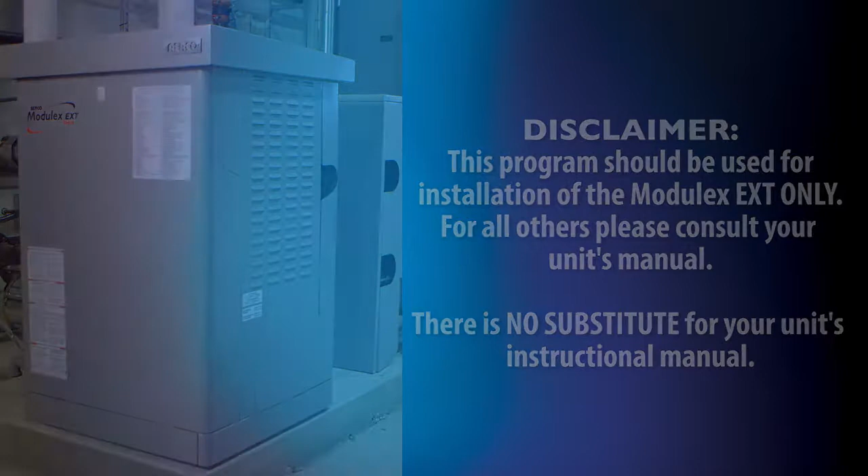Before beginning the installation of your unit, please review this list of important equipment and instruments that you'll need to perform your installation. You should have assorted screwdrivers, metric Allen wrenches, and metric sockets, a ratchet with extensions and a U-joint, metric wrenches and an adjustable wrench, assorted pliers, tools for cutting the metal flow switch paddle, a hacksaw, and a forklift or a similar piece of equipment for lifting and moving your unit.

Before we show you the procedures for installing your unit, some important warnings. First note, this appliance must be installed by a qualified engineer or technician. They must comply with the technical requirements and, under their own responsibility, guarantee the compliance of the standards according to the latest local and national regulations. Please use caution. The whole system should be thoroughly flushed in order to remove any residual dirt or grime. Not performing this step could compromise the correct operation of your boiler.

Also, please take note. Properly treated system and feed water is essential to eliminate or substantially reduce the following problems from occurring: lime scale deposit, corrosion sludge, deposits, molds and bacteria. An appropriate treatment of the supply water will prevent these problems from occurring and will help you maintain the correct operation and efficiency of your unit over time.

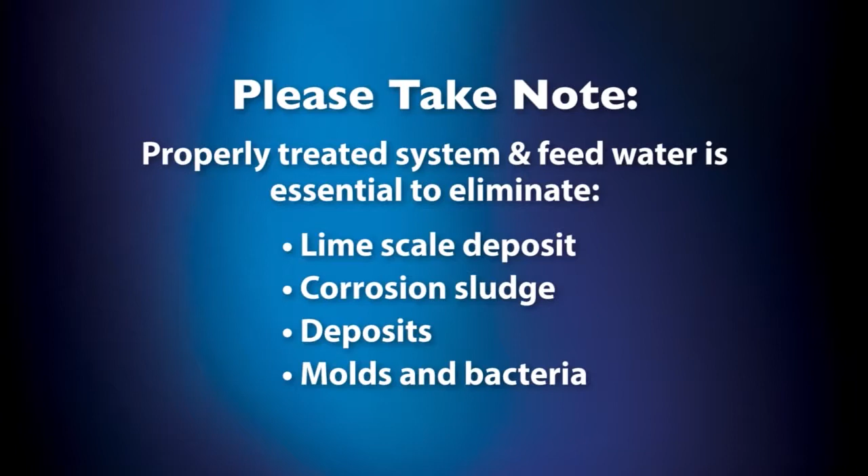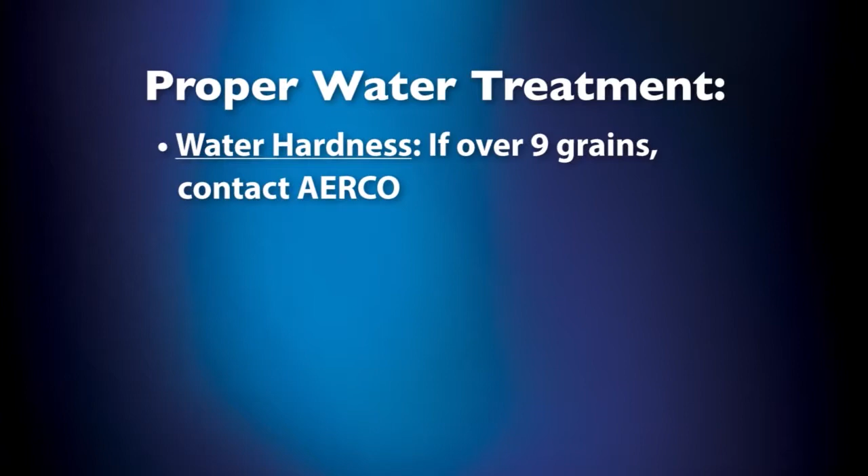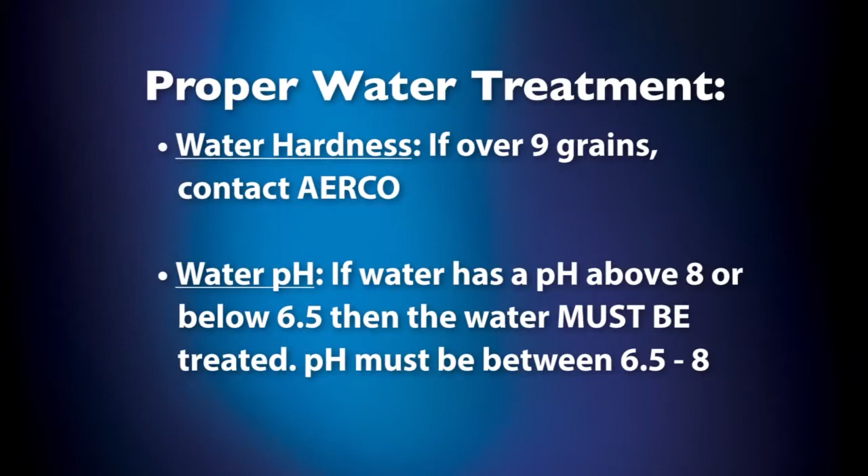Next, some important notes on proper water treatment. In order to properly treat water for use in a hydronic boiler heating system, the following physical and chemical characteristics must be addressed. Water hardness. If the water hardness is over 9 grains, contact AERCO. Water pH. If water has a pH above 8 or below 6.5, then the water must be treated to provide a medium pH of between 6.5 and 8.

Please note, for additional information concerning water quality and treatment, refer to AERCO Technical Documents Glycol Directive C401.0 and the AERCO Piping Application Guide GF-136-P.

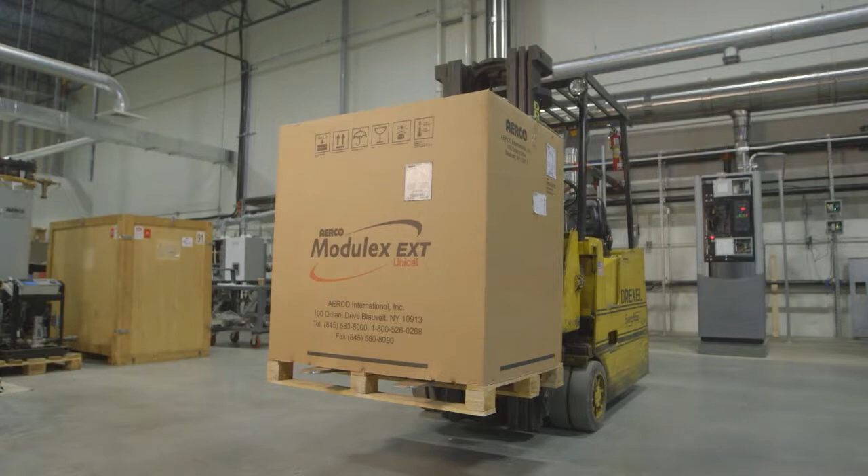Your Modulex EXT is delivered to you fully assembled and carefully protected by a plastic bag inside a strong cardboard box that is fixed on a pallet. This allows your unit to be handled easily by a forklift. All units are capable of passing through a 36-inch doorway. This includes commercial-sized units. However, please note they may require minor disassembly to make this possible.

In addition to your unit, you will receive additional components. Before we proceed with this list, please note that the components will vary from unit to unit. Your unit will be accompanied by the flue exhaust terminal screwed to the front of the frame, the sealing gasket for flue outlet mounted in the flue assembly, the sealing gasket for connecting the condensate tray and terminal, 2 bends, 1 T-piece and 1 plastic plug for the condensate drain, the screws necessary for installing the flue exhaust terminal, the external sensors, remote domestic hot water storage tank and an outdoor temperature sensor, a flue gas sample port for flue exhaust gas sampling tests,

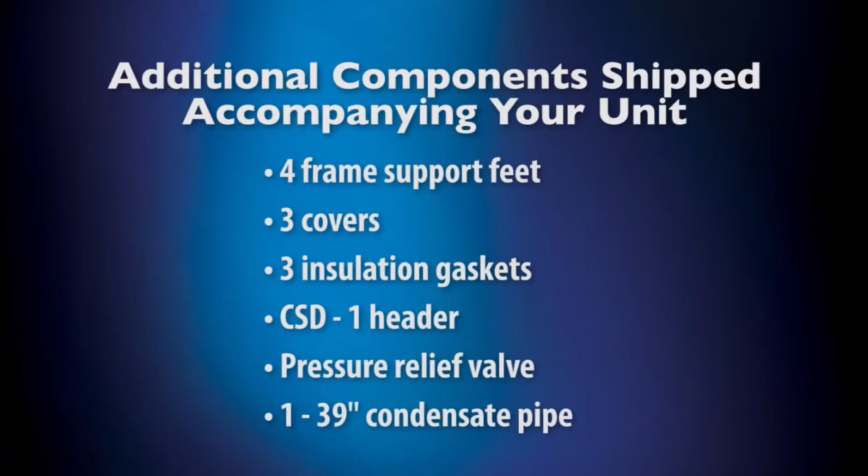a resistor kit for emergency operation, 4 frame support feet, 3 covers for switching piping locations, 3 insulation gaskets for air intake. These are to be used for installation outside. A CSD-1 header, a pressure relief valve, 1 39-inch pipe for the condensate evacuation system, left and right side covers, a plastic bag containing the user manual and the E8 controller instruction manual, 2 pins to hold the burner assembly in a raised position, a temperature and pressure gauge, a flow switch, and a rubber pipe adapter.

Commercial units will be delivered with all of the components we've already listed, as well as a burner lifting kit and an air intake starter piece that fits spiral ducts only. For any other vent or air intake starter pieces, contact AERCO directly.

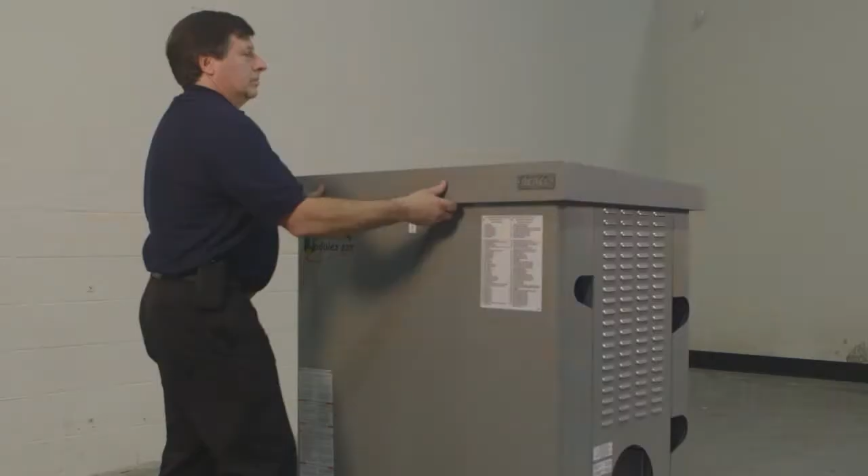Now, we'll show you how to remove your unit from its packaging and how to install the feet. First, locate the front screw. Unscrew it. Then, go to the back of your unit and unlatch the 2 latches in the back. Now, pull off all of the panels on your unit as shown here.

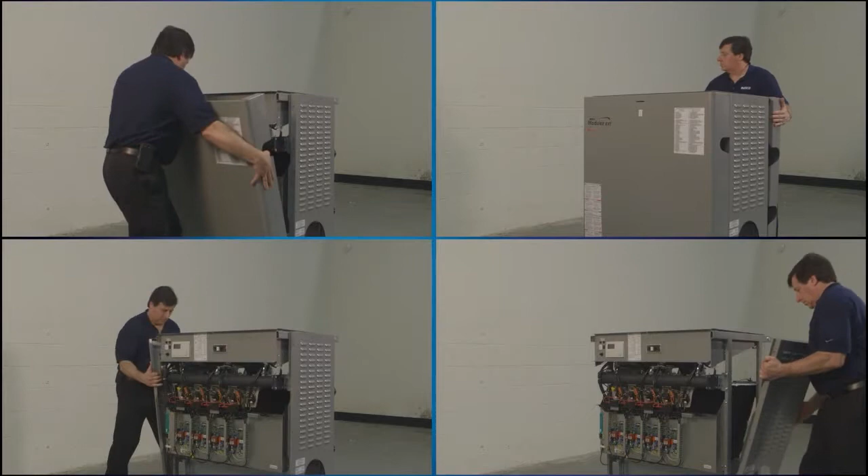Now, locate the 4 support feet from one of the cardboard boxes that accompany your unit. You will need to attach them to the chassis as shown. Proper assembly should look like this. Now that the feet are attached, place your unit on a concrete slab that resembles this.

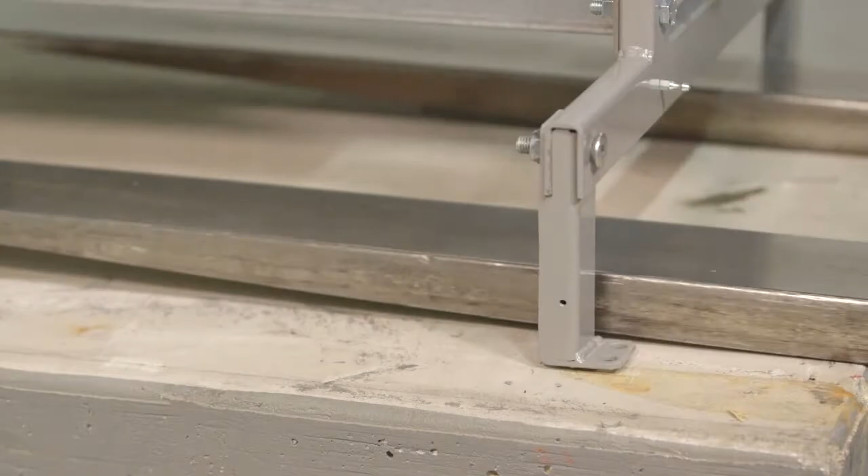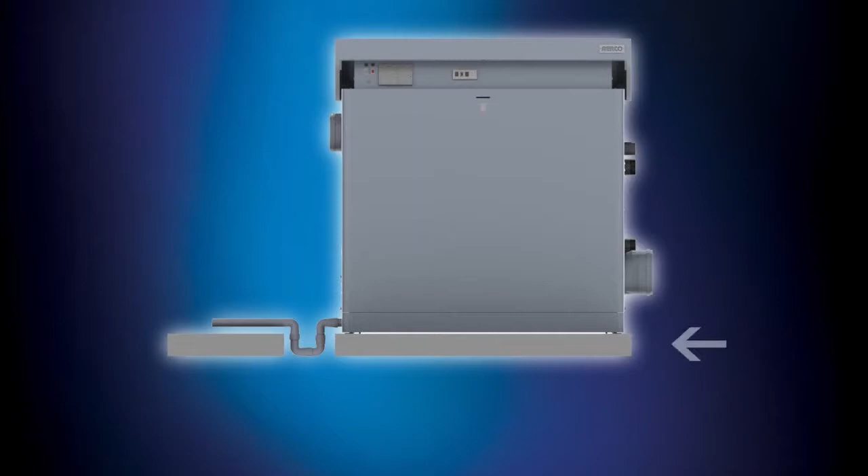When determining where to place your unit within the boiler room, special attention should be paid to local regulations and laws about boiler enclosures and boiler rooms. Your unit should be placed onto a flat and sufficiently strong base. This foundation should have the same dimensions as the boiler and should be at least 4 inches high in order to assemble the condensate drain.

Alternatively, a 4-inch deep well or trench next to the boiler that can accommodate the condensate U-drain pipe would also suffice. During installation of your unit, select a perfectly horizontal and stable location as shown here. This will greatly reduce vibrations and noises during operation.

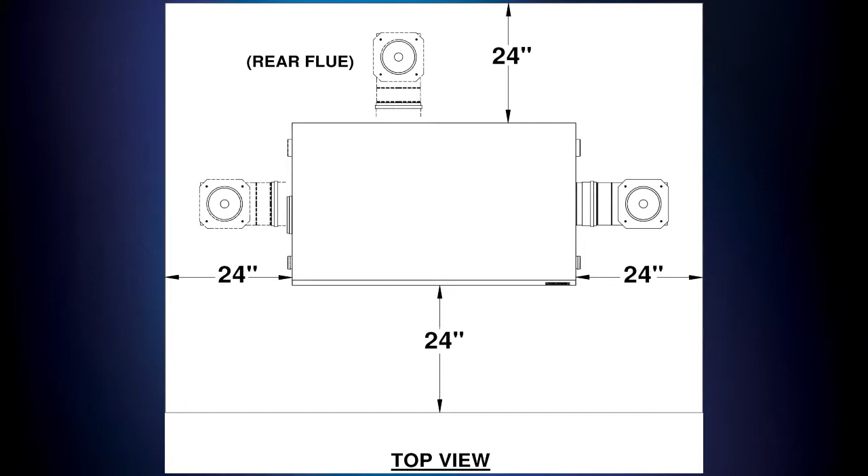Particular attention should be given to the minimum clearances around your unit as well. Proper placement will allow for easier and more efficient servicing of the unit. This diagram shows the minimum clearances around a Modulex EXT boiler, 24 inches on all sides. Please note that clearances are similar for commercial units, but require at least 32 inches clearance on the vented side of the unit.

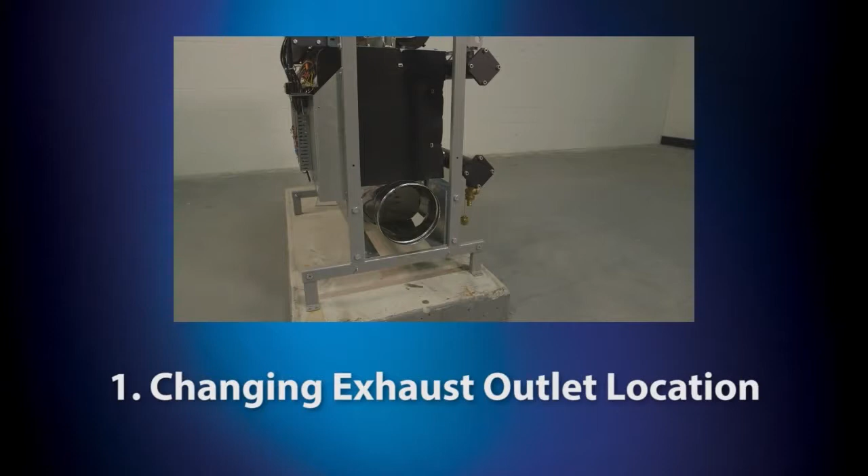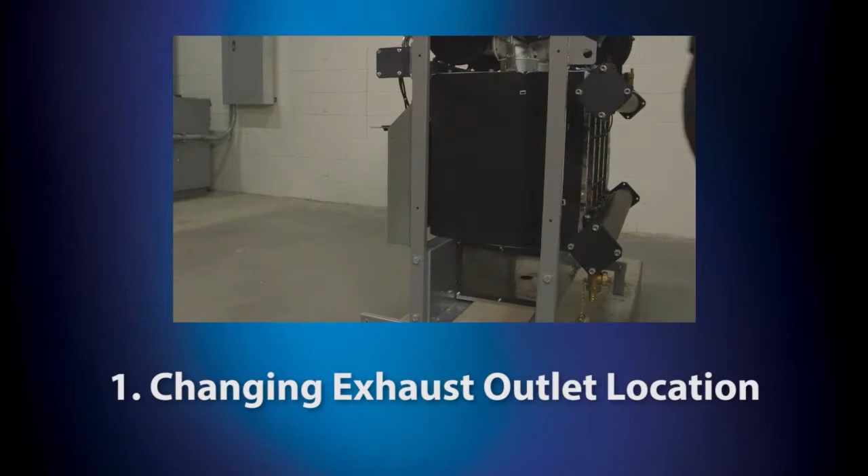First, let's show you how to change the exhaust outlet location. When your unit is delivered, the flue exhaust outlet terminal is located on the right-hand side. This is the standard delivery position. It can easily be moved to the left-hand side or rear position. A rear exhaust kit, which includes a hole cover for closing off the right-hand side panel exhaust opening, will be needed for this procedure.

Next, let's watch how the gas manifold connections are reversed. The gas connection is located on the right side of the unit, which is the standard delivery position. To move it to the left-hand side, swap the end plate and the gas supply connector as shown. It is essential that all gaskets and connections are reversed along with the connectors themselves.

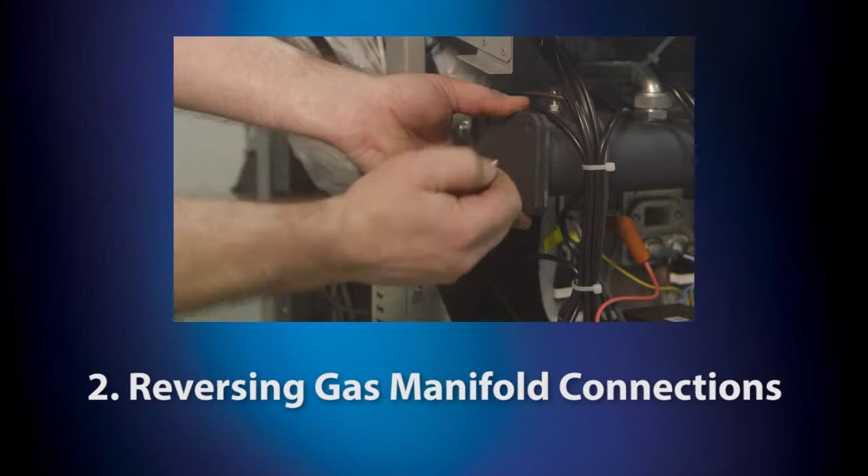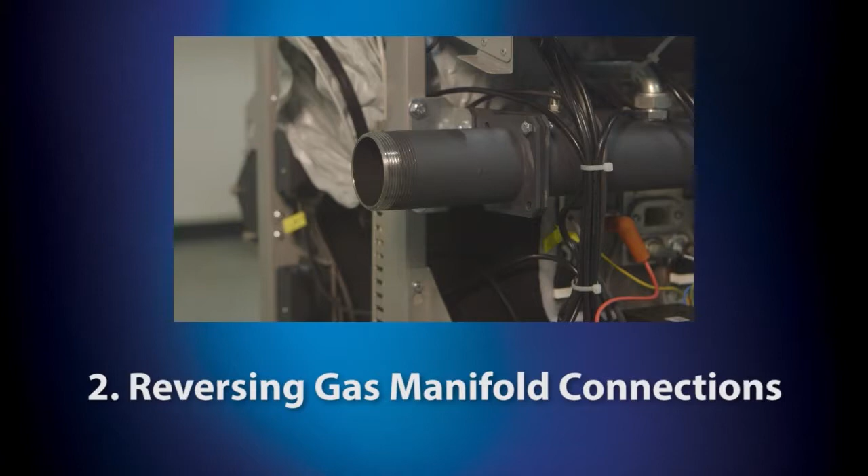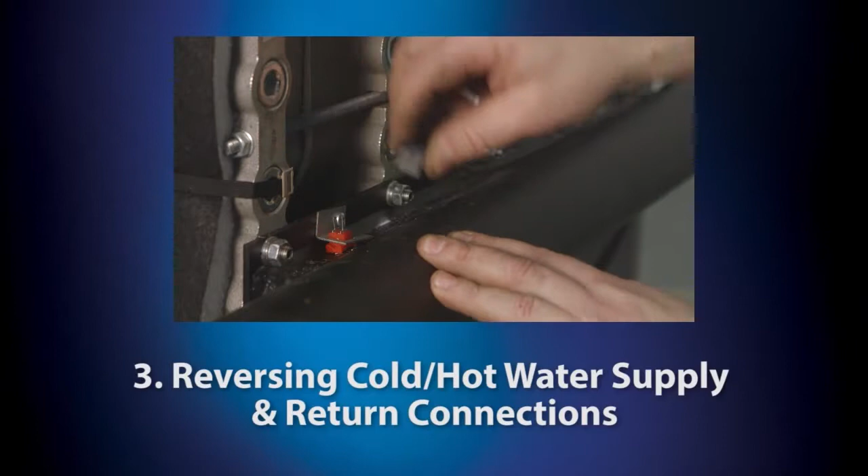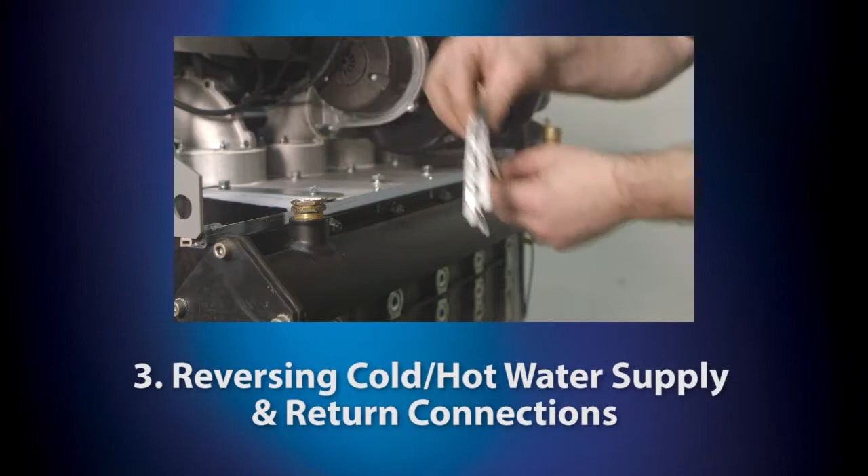Now, let's take a look at changing the water flow and return connections. This change requires that supply and return connectors are reversed as shown. Next, move the supply and return temperature sensors to the opposite end as demonstrated here. Exchange positions of the header outlet temperature sensor with the boiler sensor KF and the automatic air vent.

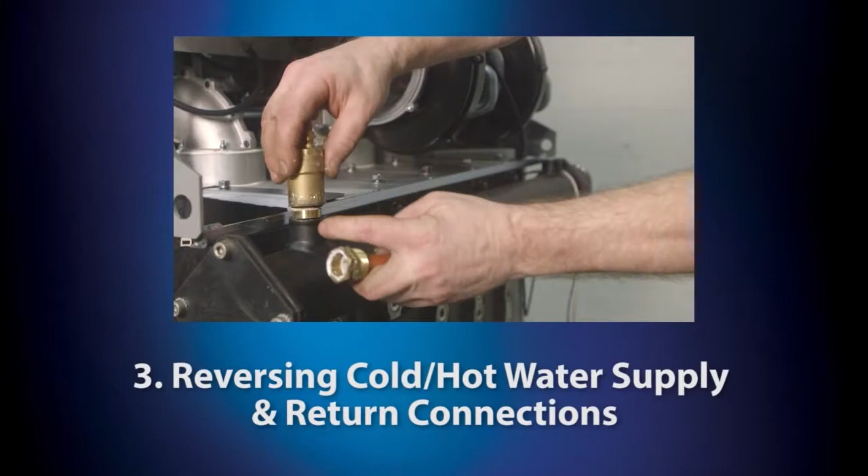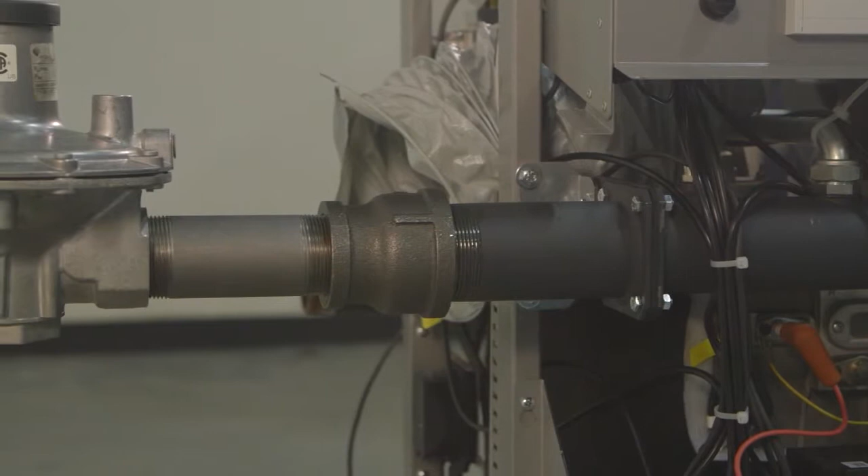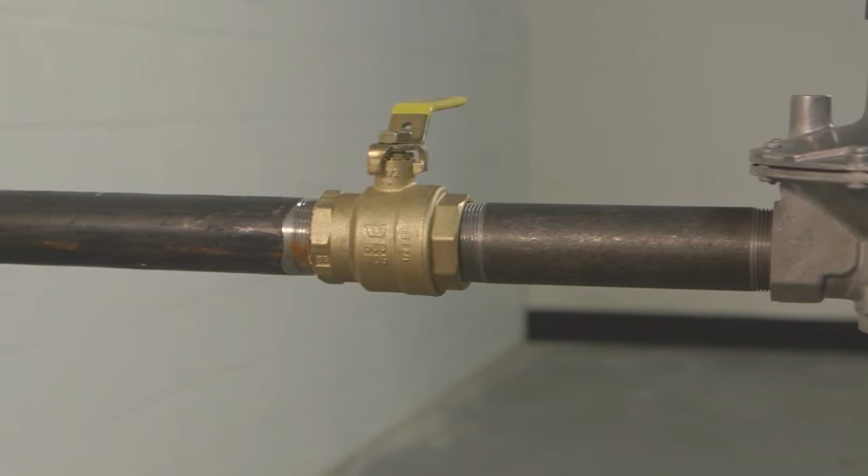On light commercial units, the boiler gas pipe is equipped with an external 2-inch male national pipe thread, or MNPT. The tailpiece of the gas shutoff valve can be connected to this as shown here. On commercial units, the boiler gas pipe is equipped with an external 3-inch ASME B16.5 flange.

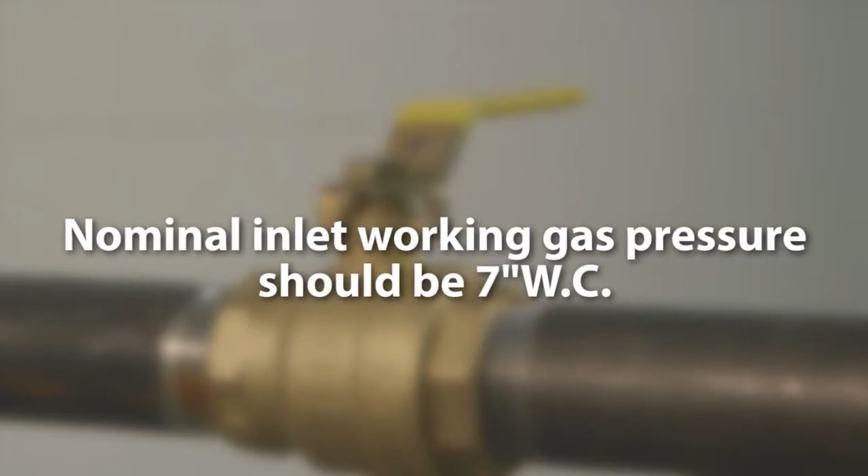When it comes to both light commercial and commercial units, the connection to the boiler must include a suitable method of gas shutoff, and a gas valve must be installed adjacent to the boiler for isolation purposes. The nominal inlet working gas pressure measured at the boiler should be 7 inches water column for natural gas.

Here are the natural gas supply pressure requirements for your unit. Maximum pressure with no flow is 10.5 inches water column. Minimum pressure with the gas flowing is 4.0 inches water column. This should be verified during boiler startup.

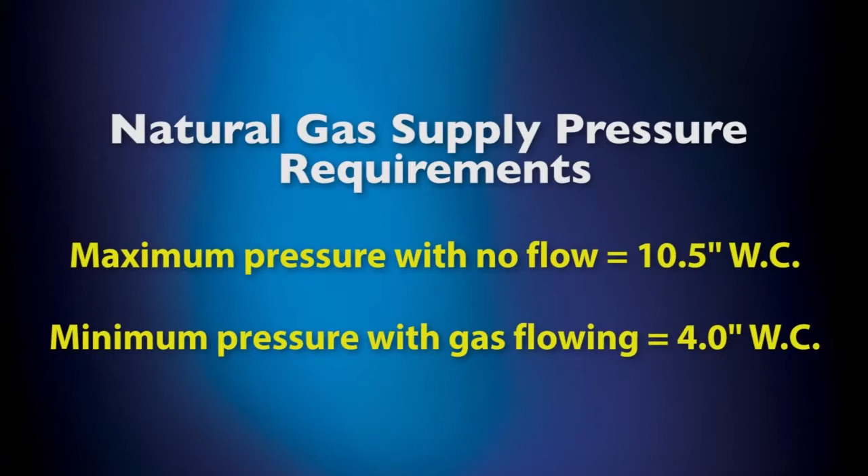Now that we've covered natural gas piping connections, let's cover propane gas piping connections. First, use a gas shutoff valve compatible with propane gases. A drip leg must be installed upstream of the gas controls. Here are propane gas supply pressure requirements for your unit.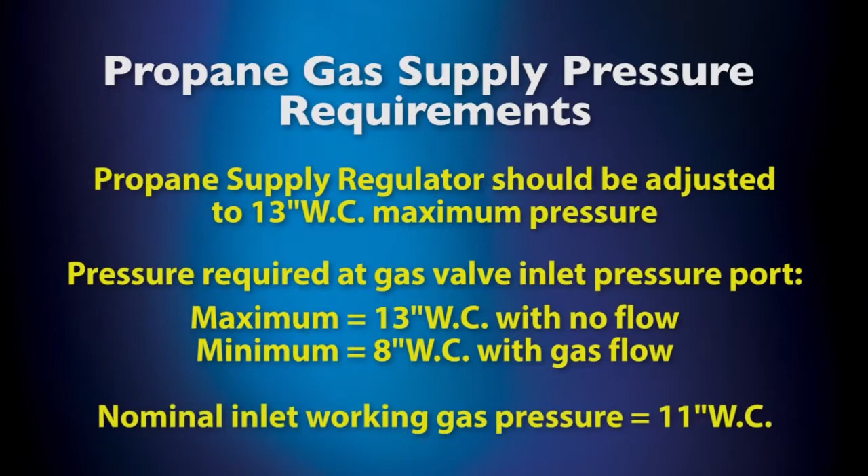Your gas supplier should provide a propane supply regulator, which should be used to adjust your unit to 13 inches water column maximum pressure. The pressure required at the gas valve inlet pressure port should be maximum 13 inches water column with no flow, minimum 8 inches water column with gas flowing. The nominal inlet working gas pressure should be 11 inches water column.

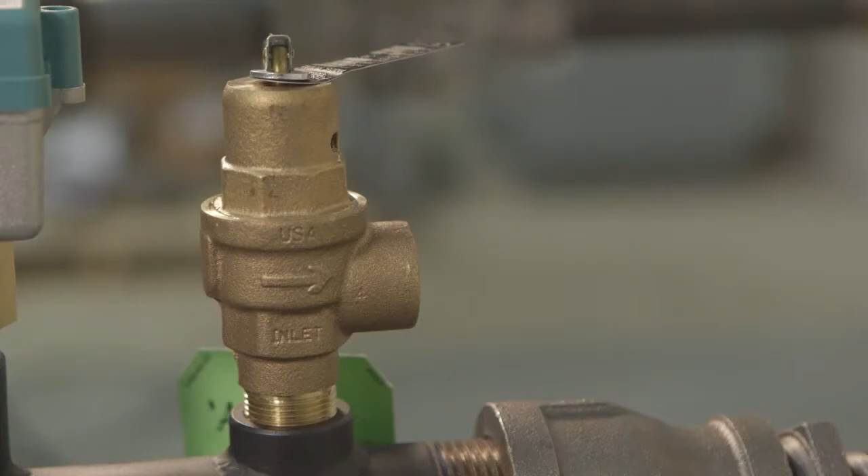The installation of the following pressure and temperature components are required for your unit: a flow switch, a pressure temperature gauge, an ASME compliant safety pressure relief valve that is designed for the boiler's output capacity. Now, we're going to show you how to install the pressure relief valve and other components.

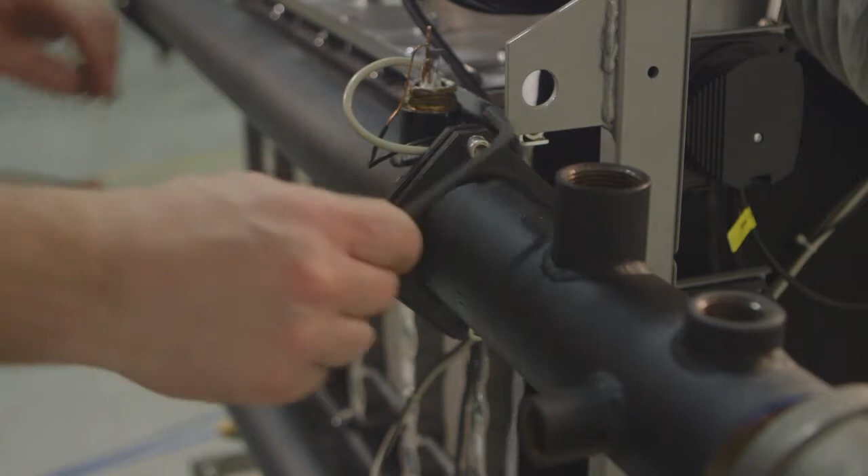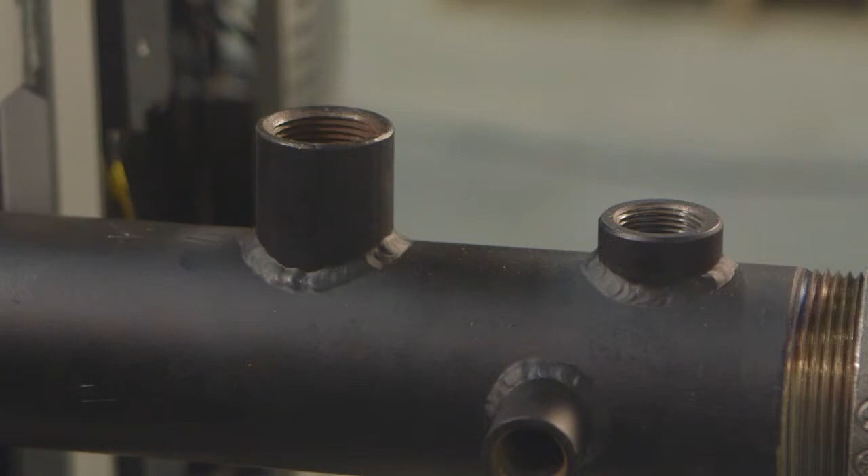Begin by attaching the CSD-1 manifold to the outlet supply connection on your unit via the flanged connections shown here. Next, cut the flow switch paddle as instructed in your unit's manual. Now, connect the following components to the tapped holes in the manifold assembly as shown: the 3/4 inch pressure relief valve, the flow switch, and the pressure temperature gauge.

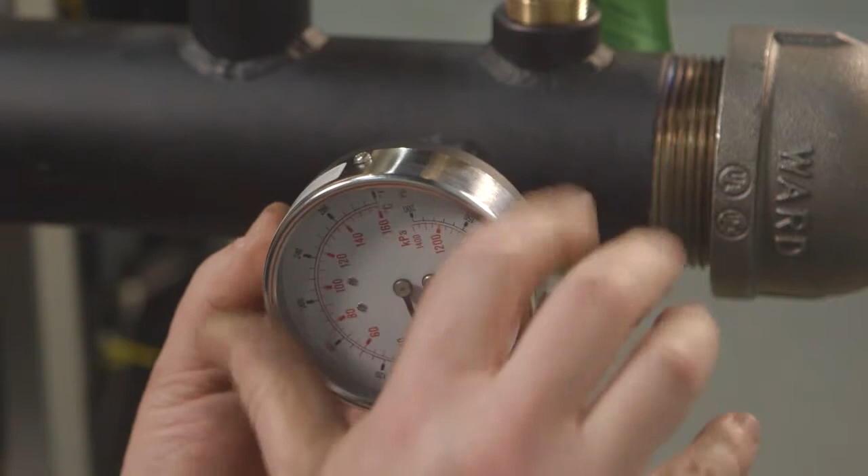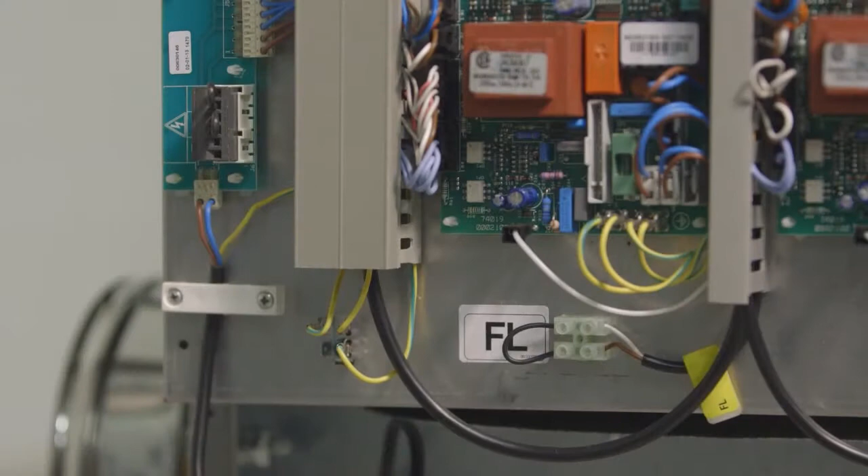Check to make sure that all components are secured tightly. Also, make sure that the flow switch paddle moves freely and without interference. Now, locate the flow switch terminal block by finding the FL label. It's located at the front of the unit, as shown here.

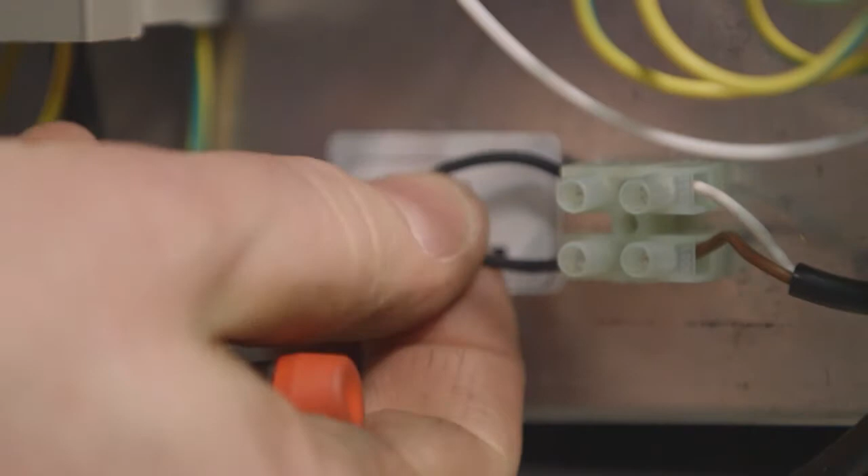Remove the black jumper wire and insert the 2 wires from the flow switch connector as demonstrated here. Flow switch wires have no polarity, so they can be inserted regardless of position. When installing your boiler, AERCO recommends a 20 mesh strainer on the water return line.

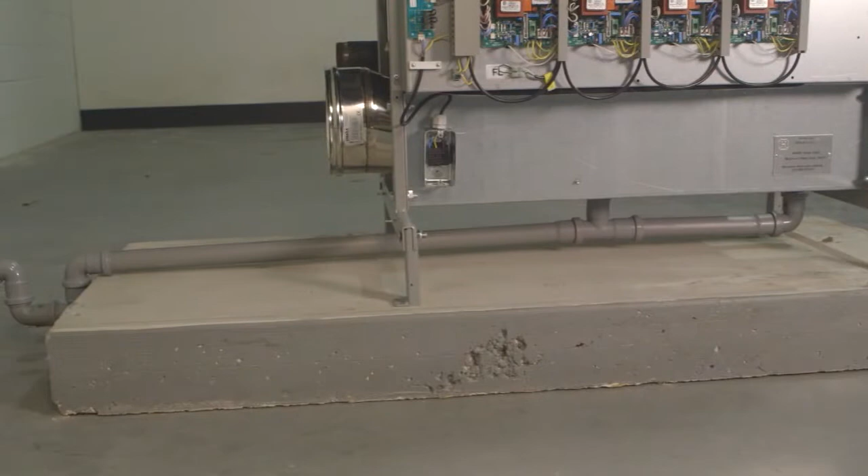Now it's time to install the condensate drain piping. It's essential that the condensate siphon be filled with water before boiler operation. Fill with water. Water should flow to the condensate drain as shown here.

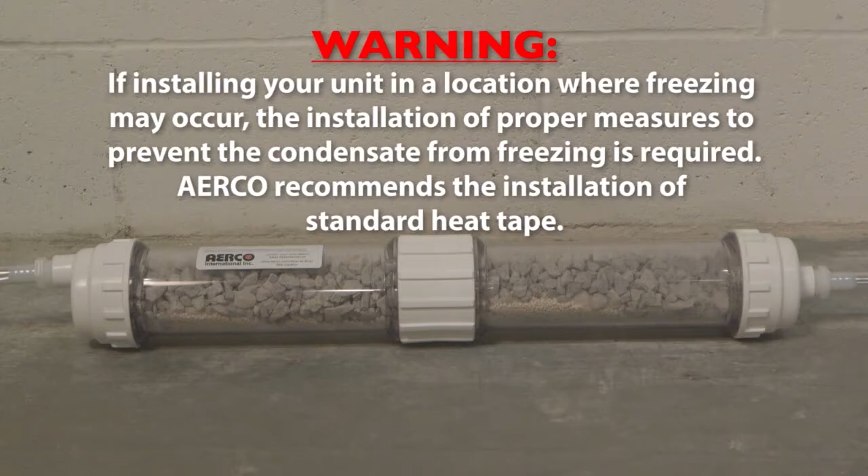Before we go any further, an important warning. If you're installing your unit in a location where freezing may occur, the installation of proper measures to prevent the condensate from freezing is required. AERCO recommends the installation of standard heat tape. If using sealed combustion, install the air intake into the side of the unit as demonstrated here.

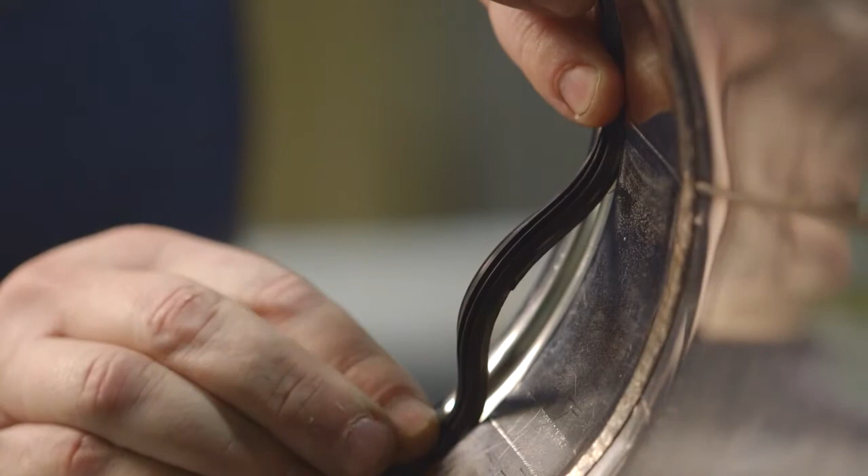Begin by working the gasket around the inner lip of the adapter as shown here until it fits into place like this. It's important to note that the gasket may appear to be too large for the adapter. This is an intentional design that allows for a tight fit. Affix the exhaust manifold adapter to the unit.

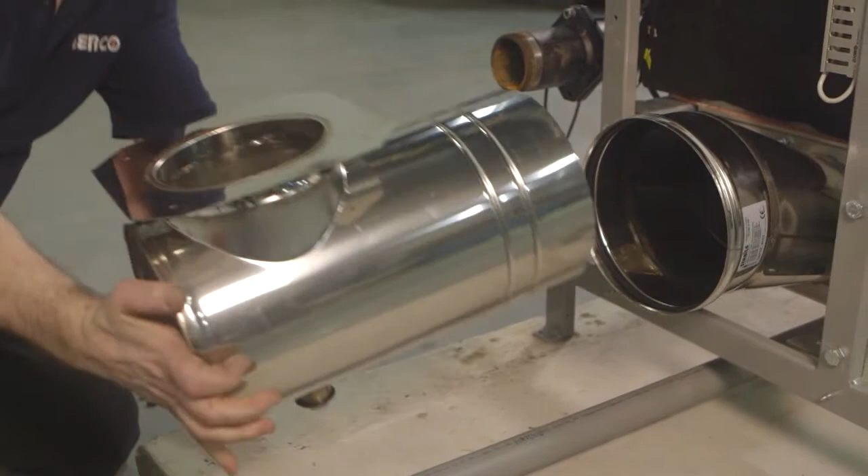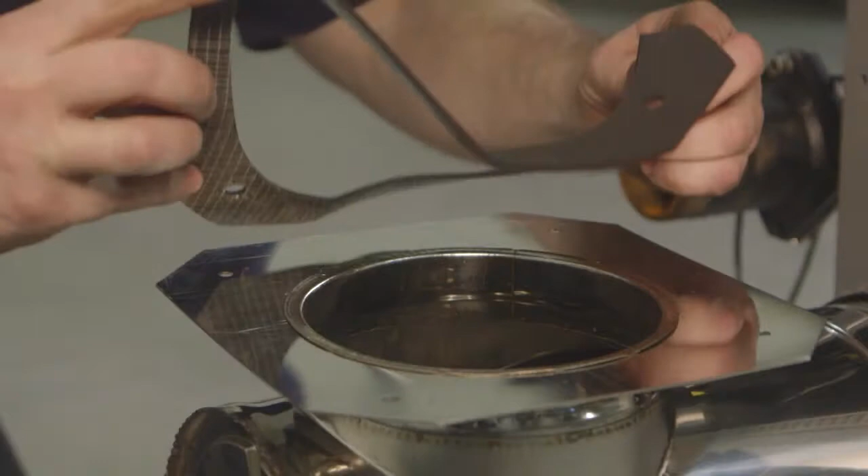Plug the open port. Affix a suitable plug to the inspection port in the European to American flue adapter. Insert this adapter into the gasketed adapter. Remove the paper backing from the gasket and affix it to the European to American adapter as shown. Install the PVC vent starter piece by affixing to the gasket using the nuts and washers that accompanied your unit.

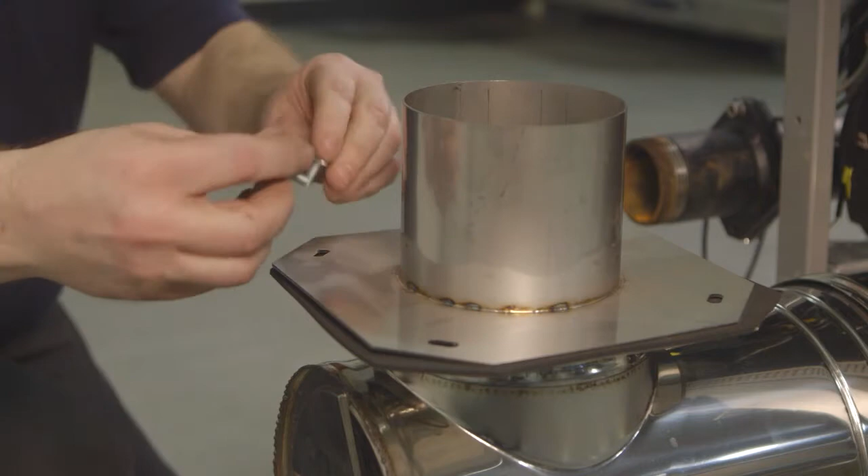If it isn't already integrated into the venting, you'll need to create a test nipple for measuring combustion gases. It should be installed onto the first 3 feet of the flue. Begin by drilling a small hole with a diameter of 0.83 inches as shown here. Use the included kit to create the test nipple.

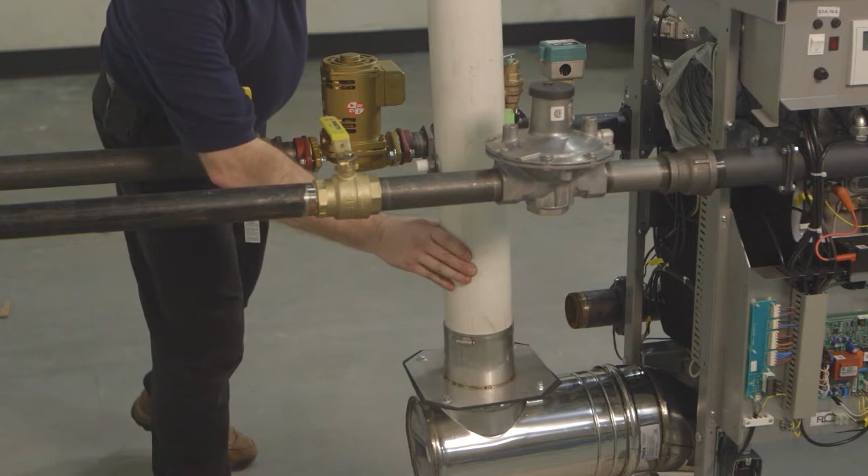The flue must be impermeable to exhaust and must be made of corrosion-resistant materials. Take note, the light commercial Modulex comes with a vent starter piece for PVC. For other starter pieces, contact AERCO directly. In order to determine the proper cross-section and height dimensions of the exhaust piping, you should adhere to national and local rules, as well as adhering to the AERCO Venting Application Guide

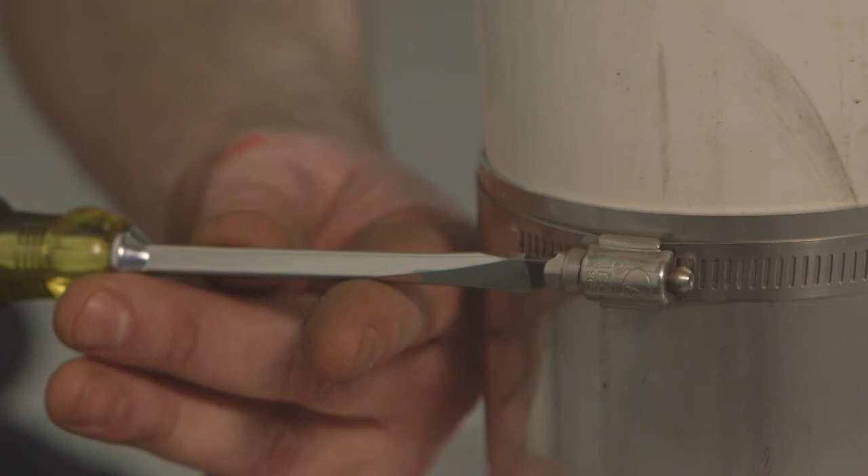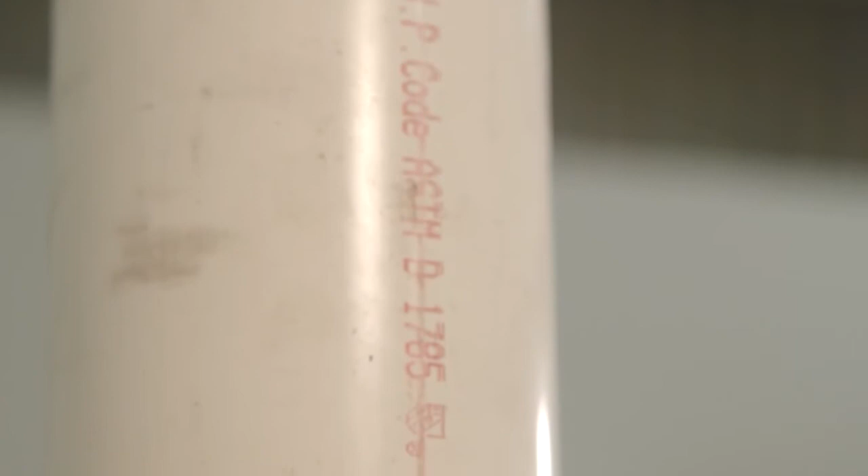GF-136V. If you are using PVC venting, the flue venting pipe should be affixed to the adapter using RTV. Then, it should be clamped with a worm-driven hose clamp as shown. When using plastic venting materials, use single-wall uninsulated pipes, Schedule 40 or thicker.

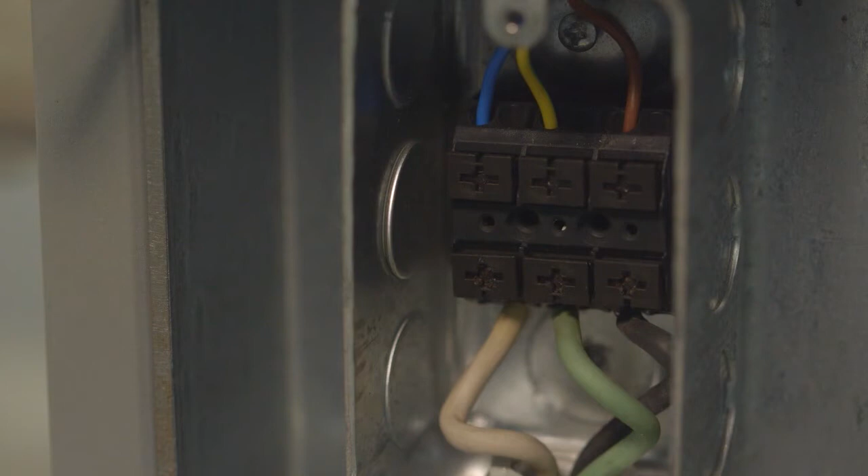Regarding the main electrical supply connection on your unit, a 120-volt, 60 Hz power source is required. Make sure you wire correctly, white to blue, black to brown, and ground to green and yellow, as shown here. This is the E8 controller on your unit. Due to many possible configurations for controller terminal assignments, please refer to the manual that accompanied your unit.

We hope you found this presentation to be a useful tool for learning about the best installation practices and design features of this AERCO product. These video chapters are not a substitute for the instructional manual that accompanied